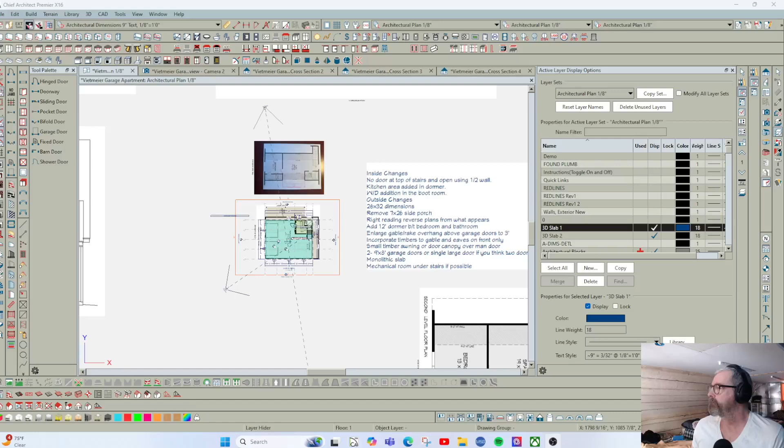Hey Scott, let's go ahead and take a look at this.

I brought in the plan, and you can kind of see that the original one, the 26 by 36, is kind of floating underneath this plan here. So we're squeezing it down quite a bit. There's a few things we got to make sure work.

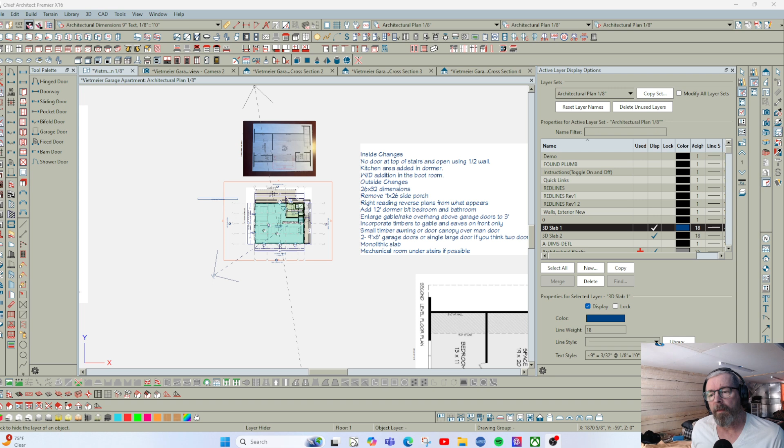I think one thing I found out that was the most difficult right off the bat was the stairs at the top of the landing. I don't think that's going to work for us. We need to do something here. Okay, so right at the top of the landing, let me do a couple sections.

I think I've got one up here. In order to have enough at the top, we've got room, but we do not have room for 5 foot to put that bathroom right at the top on this side.

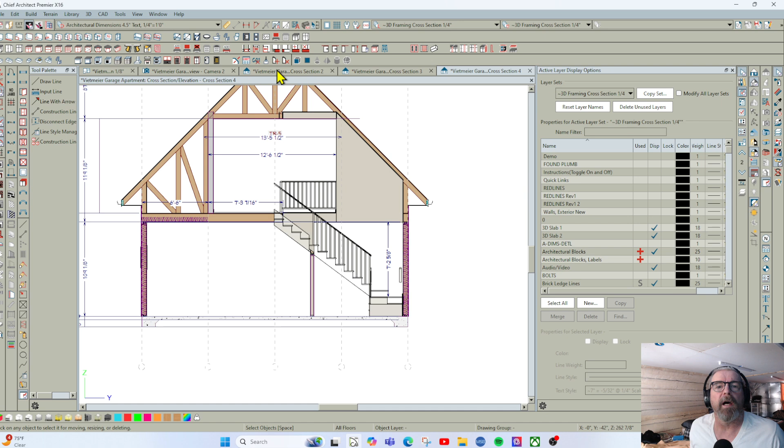Let me get rid of this. Kind of shows some of the framing. I've got the attic trusses drawn in there, which I assume is how we would do it.

Typically, when I used to do them, I would float in the stairs on one end - that's a great way to do that. The first truss ends as a girder truss, a 2-ply, and then you would just ladder frame up and over the top. And also the floor gets ladder framed up here in between the two.

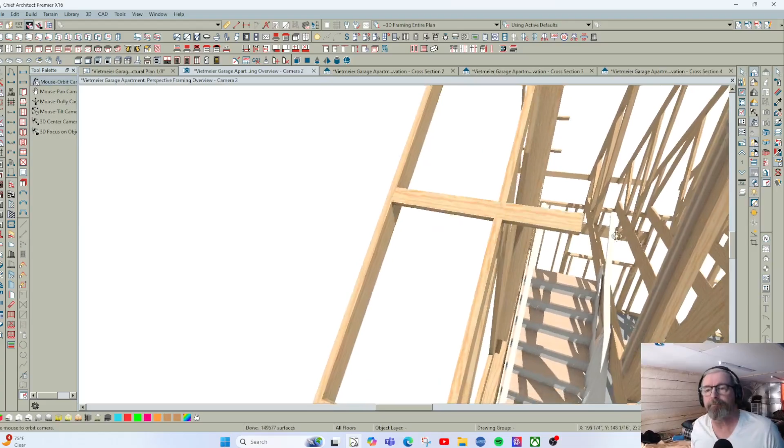Over here, we'll have to talk to - we got to find out for sure what you're looking at doing, but the span in between these two girders is limited by what we're going to be trying to do.

And to put 12 there, that's a pretty big load to try to push across those girders, but maybe it's possible. All we're going to do is use the girders here to pick up our floor load, and you could possibly frame a wall back here up.

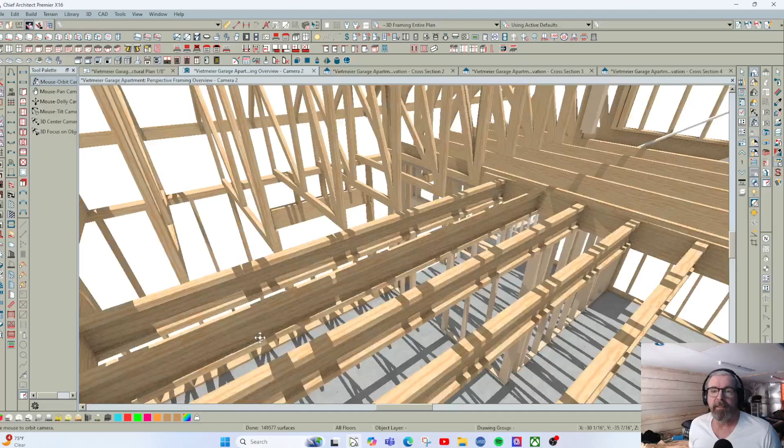If you just framed a higher wall, or actually rolled a joist all the way across this midsection, so you'd have a 12 foot by 12 foot by 26, that floor joists would sit on the plate lines.

That way this would bear on the wall, and you may not want to do it, but let me grab a 3D of the outside of this thing.

I mean, right now we've got a 12-12 with a 6-12. I've got a 9-foot floor on the first floor, a 9 foot on the second. Let me see, I'm going to pull up the layout real quick.

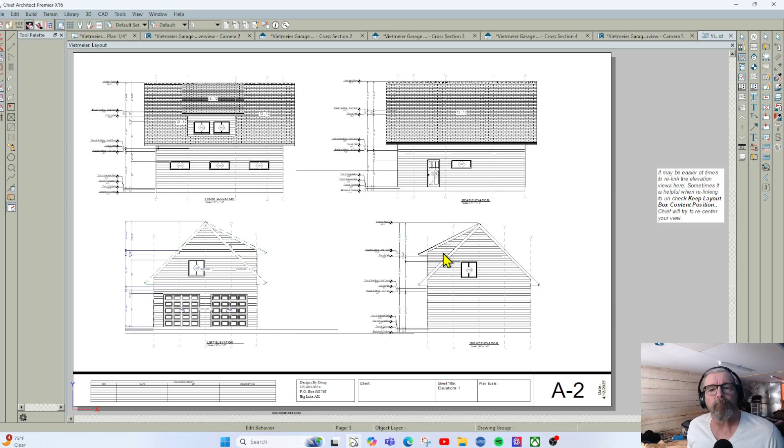And basically, I put the bathroom on this side because the stairs are over here. There's not enough room up there at the top, so we'll work with that. I just tossed in the windows just to have windows.

Let me get that down here, sorry about that. And then we've got - basically, I dropped the windows in just at random. I don't know really what we're going to want there. That goes to say with this.

So I do have a 12 foot. Now, if we put - I've done it before where if you rolled a section of flooring from this wall to this wall, and you have attic trusses on both sides, you'd roll the flooring, build your floor up on that wall, and then you could span a truss up to the peak and back down.

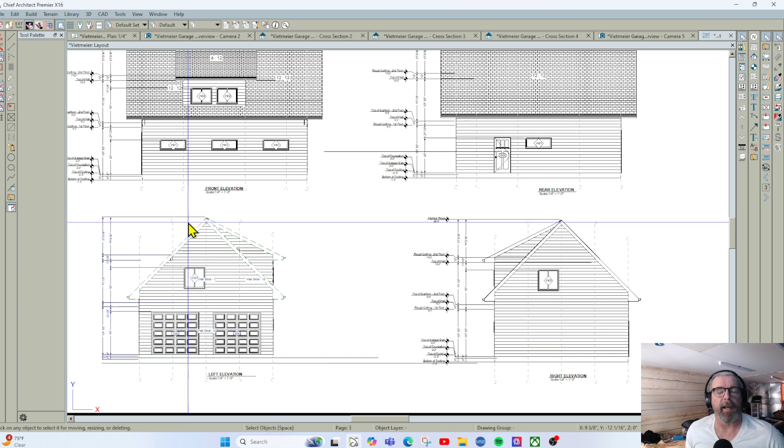So you'd have a 6-12 truss sitting on a wall here and a 6-12 truss, and it would come over to here. I know we're trying to do a single slope, but we're going to run into some problems with that attic truss, maybe, especially if we want a 12 foot.

So I'll just buzz through a couple of these pages, shows a couple sections. We've got about 720 something in the garage. The boot room, I come out 12, and we're about 9.6 this way. The stairs fit in there fairly well.

Typically, by doing this, if you don't try to put it in at the beginning here, usually I can get 2 stairs up, starter winders, and then bring this section of the stairs through that 4-foot well, and we'll see it in the 3D when we get to it. This gets us a landing at the top. And maybe it's possible you could put the toilet room in this, but no matter what, if you were to try to come out and go around it, it's difficult. And we'll do some 3Ds here in a second.

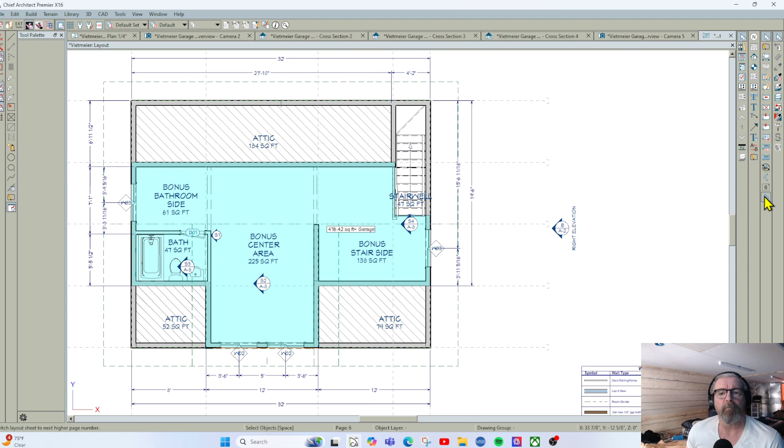If we did it where you put a girder truss, an attic truss here, and an attic truss here, then I've done them where I put the bottom chord load of the floor, and you can float this whole thing across. And I mean, you could bring it all the way through, like I was saying, put a wall up here, and put regular trusses in there, and only have attics on the end. It just has to do really with what you want to do.

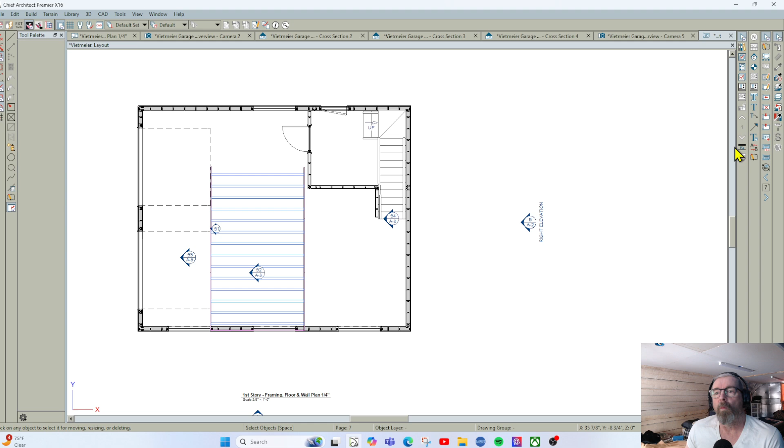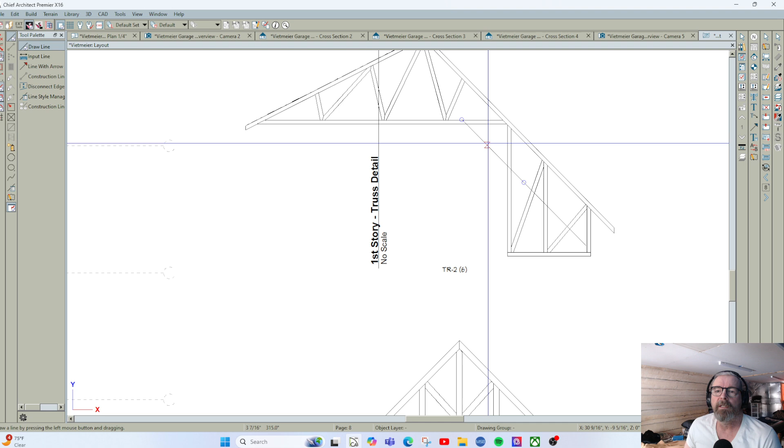Here's just kind of the profile of the attics. When I do this style, a single slope like that, a lot of times I've done them where I did a parallel chord and I would slope it. I might be able to draw a line in there. Let's see. I would just slope a bottom chord underneath this, and you do a portion of this that would be a parallel chord like that, so that you'd have some webbing in this area to create the strength. Because you need that meat in the corner to make that truss work. The truss guys will figure this out too.

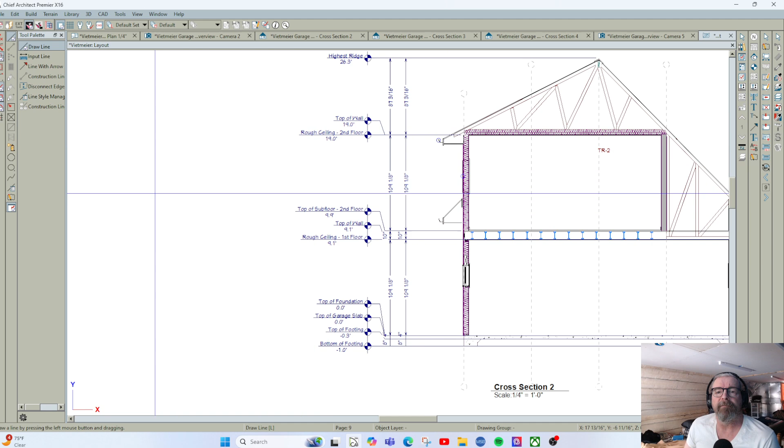We are dealing with a 9-foot ceiling in there. You can kind of see I've got the 9-foot first floor. The trusses, if we go with them, they're going to use a 2x10, likely a 9 1/4. That's what I used to always use. So you'll have your 9-foot, the 9 1/4, and then another 9-foot. So that puts our top plate up here at 19 feet. So that's kind of the envelope there.

You can kind of see what I had. This is just some sectional cut throughs, square foot takeoff to get an idea where we're at. The doors, your windows. There'll be a basic electric when we get done with it. I don't typically do much with that. I call it a rough electrical. So let's do a quick 3D of it and finish this thing up.

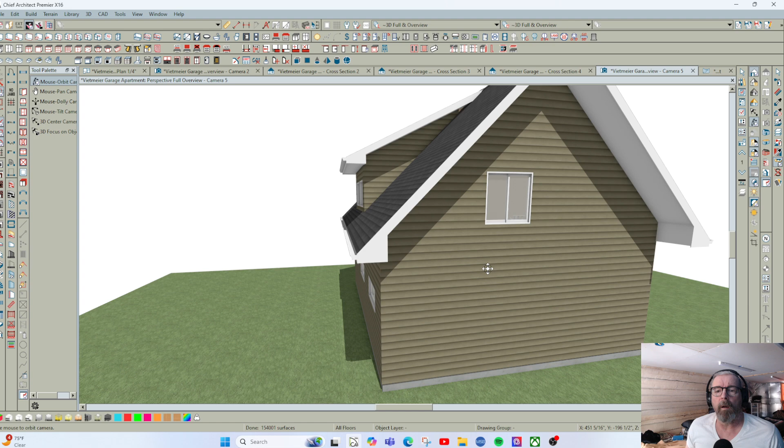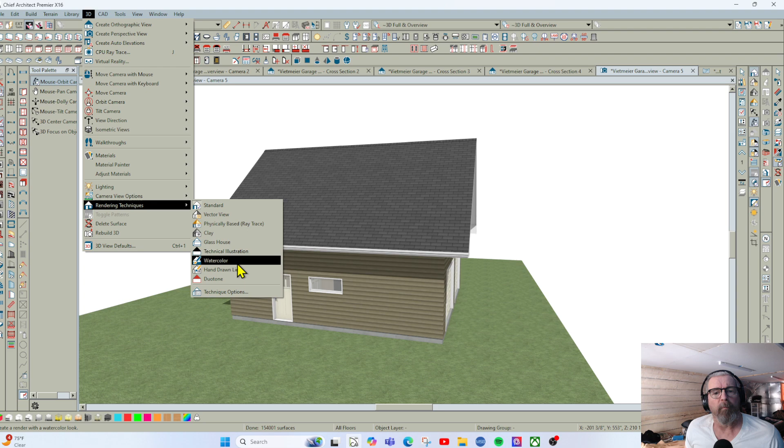I hadn't even started with anything for the most part inside. I'll do a 3D now in glass. Let's look at that because I want to make sure I'm on the same page as you coming through around this corner here. So we've got this little room.

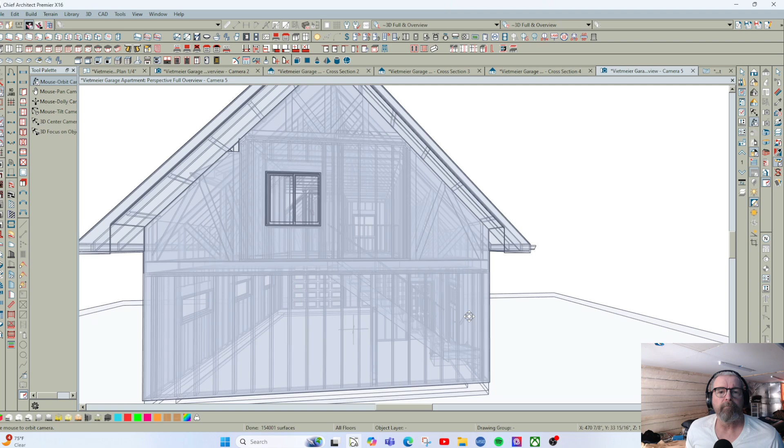Typically, you'll have a single truss here. You'll have a 2-ply truss on the other side of your stairs, and a ladder frame across that. Then you'll have standard trusses down to about here. And depending on what your system calls for, you might have a 2, 3-ply, maybe a 4-ply truss on each side, allowing you to pick up floor, wall, and roof load through that area, depending on how you want to deliver it.

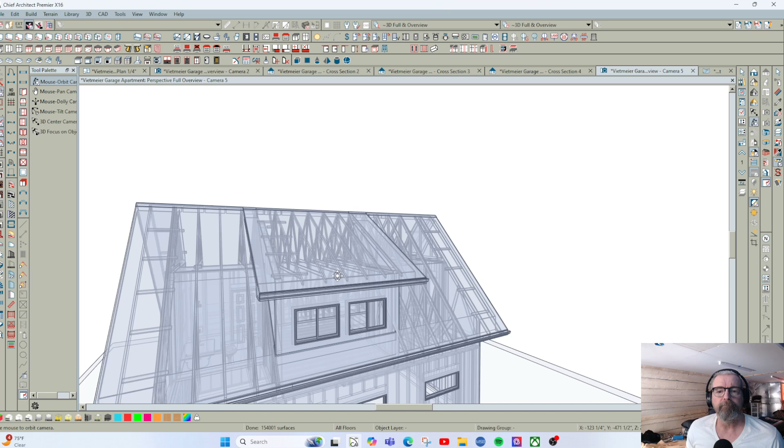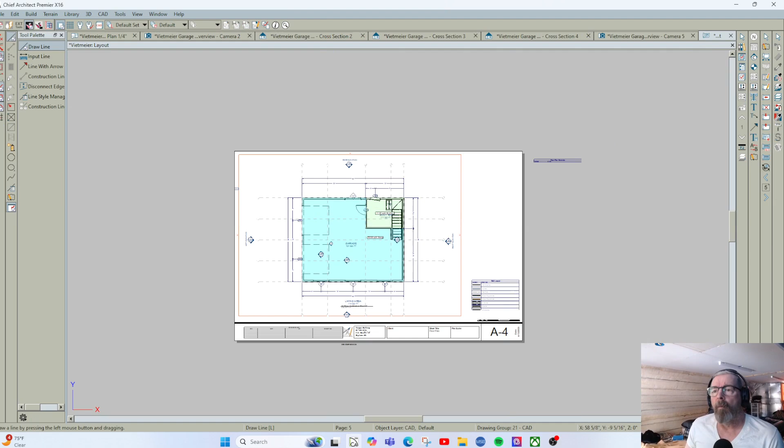This is where I tuck the bathroom over and up on this. Rule of thumb on an attic truss, and they can break it a little bit, but just to go back to that real quick, we're 26 overall wide, and the way they do that, let's see, I closed the, there we go. Excuse me. Well, I got this doggone cough.

It's pretty rough. So here, on the rule of thumb for the trusses, you'll see my construction lines here. Half the span, this is 26 foot, so half of it you'd get 13 foot in the middle. And so basically that's kind of what I'm looking at in the middle there. And the reason is you need the other half to create the structure that holds the floor up.

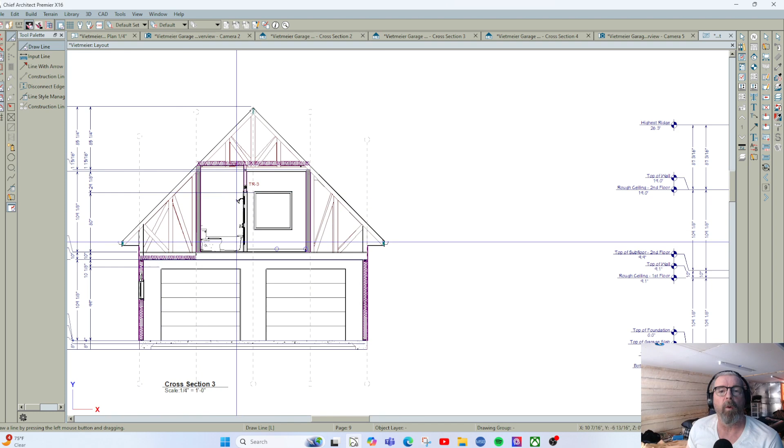So if you had 13 foot in the middle, that's kind of where I'm basing this. The guys in the truss plant, they might be able to do a little bit more, but this is how I base it. Looks like I got to clean that up. It's checking the dimensions. I made it 13 foot because that's probably what they're going to have. That's what our limit's going to be. So

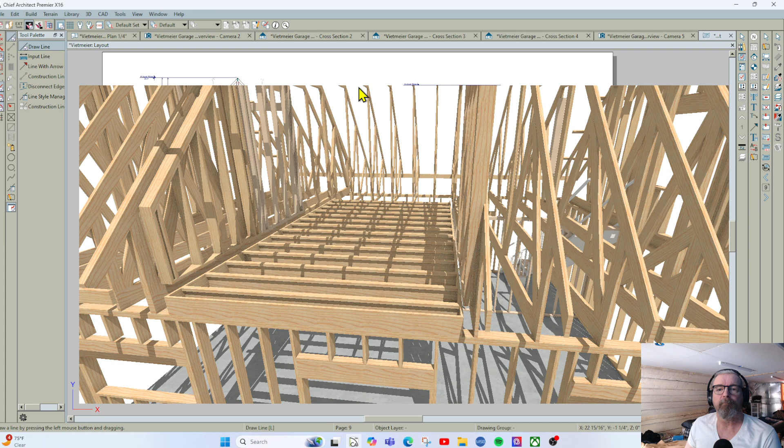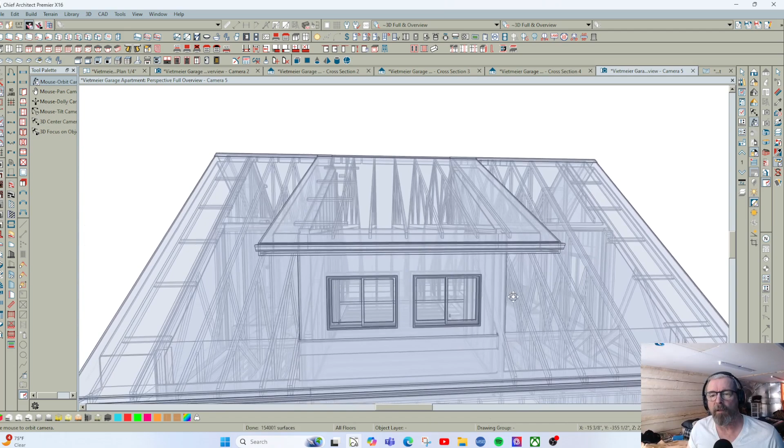typically what I would do is take and come down, and this might end up being a 2 or 3-ply on the outsides of this rim here. And that way, when you bring it to the inside, the guys will stack frame this wall here right on top of that 3-ply. So that 3-ply truss on both sides will carry the load of this wall on both sides.

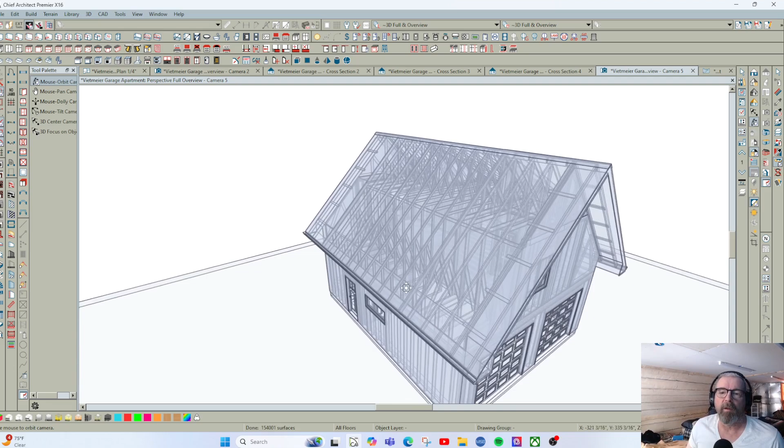And then again, depending on how we do that inside, this truss here might come up and stretch over to that wall too. It would be a lot easier if this wall here was the same over there and you had just a standard 612 that came across, that would be pretty simple, but it does involve bringing that floor system all the way through.

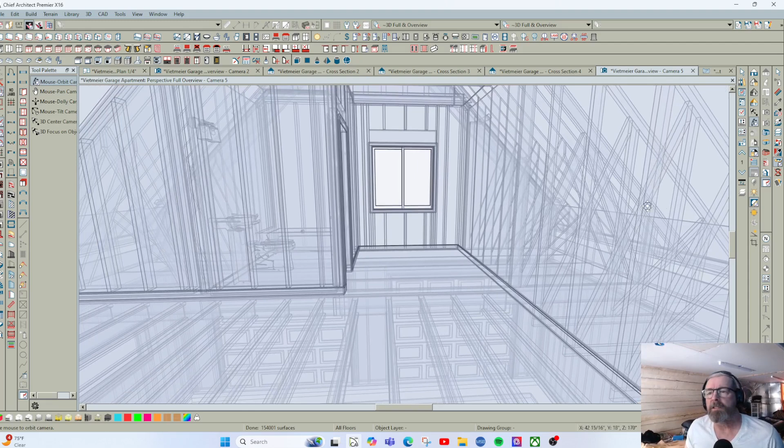And it seems like I remember doing these before when I was at the truss plant. I would put a box girder in between these two pieces here, and then that would load all of this quarter of that side onto this truss, would hang off of that box girder, and it put all the loads back to these two side trusses. So let's put this back into the standard view and we'll finish going through this. Okay.

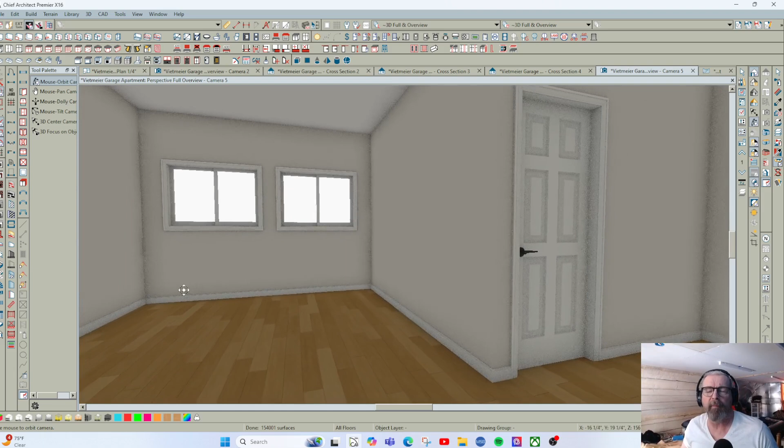And this is, I didn't put any cabinets in there yet. I know this is where you were talking about doing the kitchen cabinets and whatnot. So I wanted to just kind of iron things out, make sure we're good to go. The other one had the toilet room right here, or the bathroom at the top.

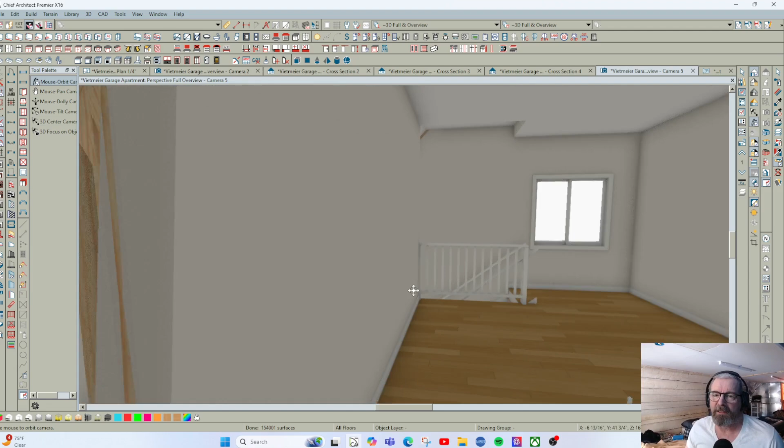And I don't think we can do it. We could sometimes pack stuff into them sidewalls, but that's usually over here. This is in the structural part of the truss, and you can't get nothing in there. So I tried to work within the confines of that, and that's what we're dealing with. Let me go down here.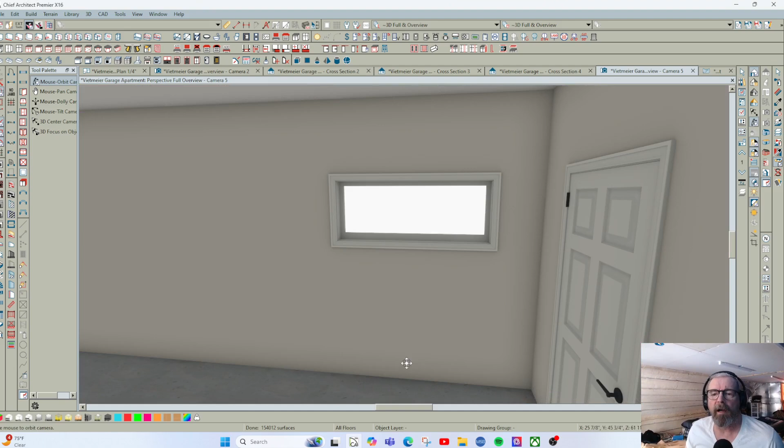With this particular application, we do have enough headroom right here, and I'm still trying to fit where these doors are. I haven't firmed them up there. I had a 3.0 door there. We've got this 3.0 door here. Then we've got the regular garage. I put, I think, 2 9x8s here. Yeah, that's what I've got.

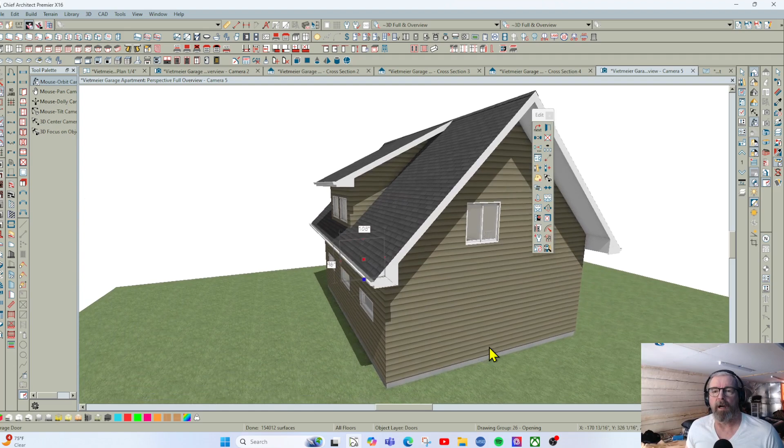So anyways, take a look at the paperwork, take a look at the elevations. If all this looks pretty good and this is something you're looking at doing, we'll get the details together, get me a deposit, and then I can start working on that facade, your gables, the Craftsman style reinforced gables. Again, nobody's going to do that except the contractor. The truss plant doesn't even do anything for you on that.

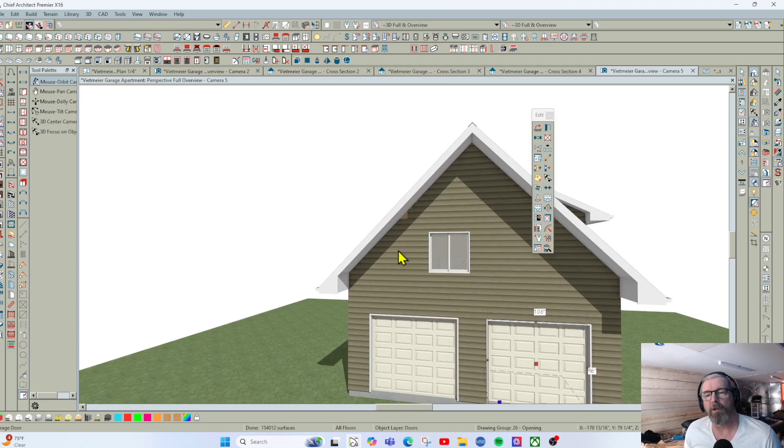However, it might be something you would look at where they drop these first two trusses. If you have the supports, it won't make a difference. But when I was doing it, they would do a drop gable so that they could run the ladder framing perpendicular over the top of the first two trusses, and it gave a lot more ability to float that out.

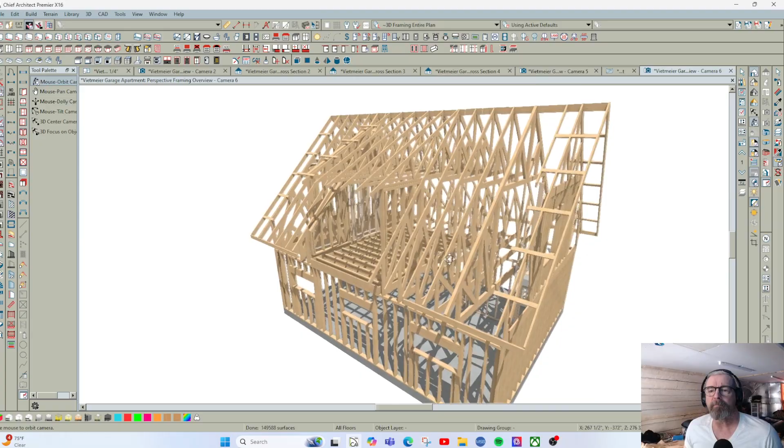So anyways, I hope that looks good, Scott. Sorry it took me so long. It did get kind of complex, but I think we're looking good. What's this look like here? I'll see if I can do the framing real quick. This is how I would do it. Bring that attic truss right out to the end and then frame the end wall right inside of that attic.